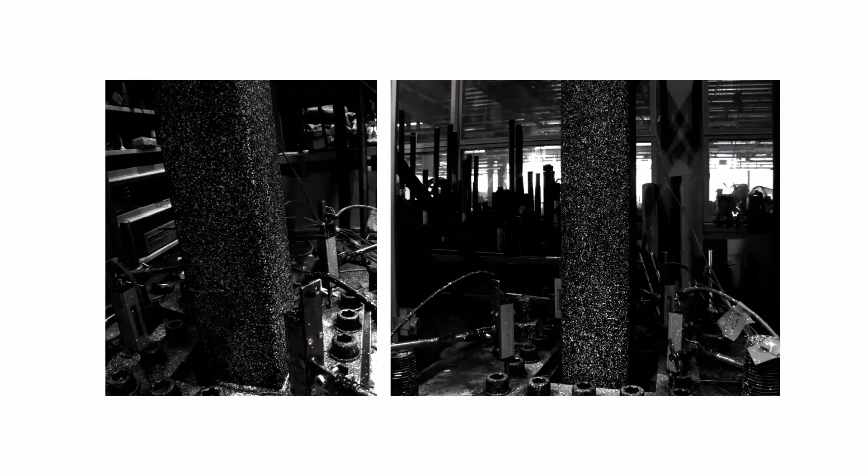Thank you very much, Marco. It's indeed a great pleasure to talk to you today a bit about my PhD research, mainly on the cyclic response of steel tubes infilled with rubberized alkali-activated concrete. So this is really what I'll be presenting to you about today.

We tested some steel tubes under reverse cyclic loading, and we looked at the member response and other key seismic design parameters. But before I talk about this, it's perhaps wise just to let you know how we got to this point, what is alkali-activated concrete and what rubber has to do with it.

You might be aware that concrete is the most consumed material on the planet, second actually after water, and we produce about 30 billion tons of concrete every year. This is a very large number that is sometimes hard to imagine. So just to put it in perspective, at this rate we produce enough concrete to fill the size of Big Ben every 35 seconds.

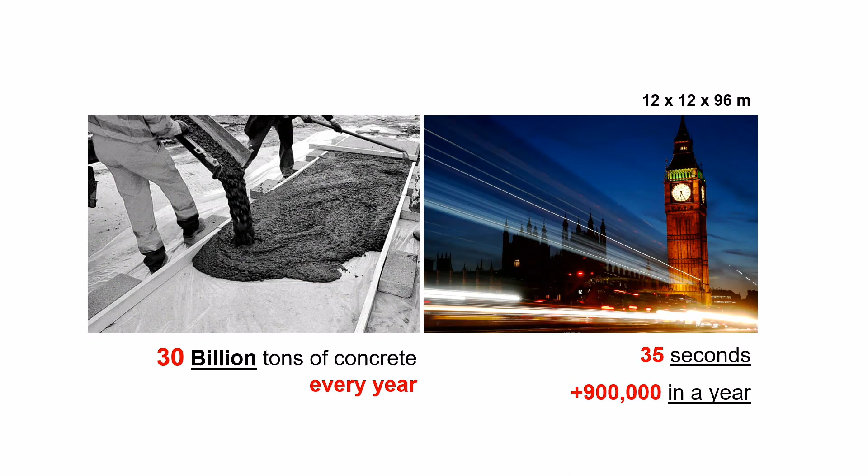In other words, we produce enough concrete to fill the size of over 900,000 Big Bens in a year. That's a problem because cement, one of the main ingredients in concrete, its production is quite highly energy intensive and is responsible for about 8% of global carbon emissions. So if cement was a country, it would be ranked third, just behind China and the US, and way ahead of the UK in terms of carbon emissions.

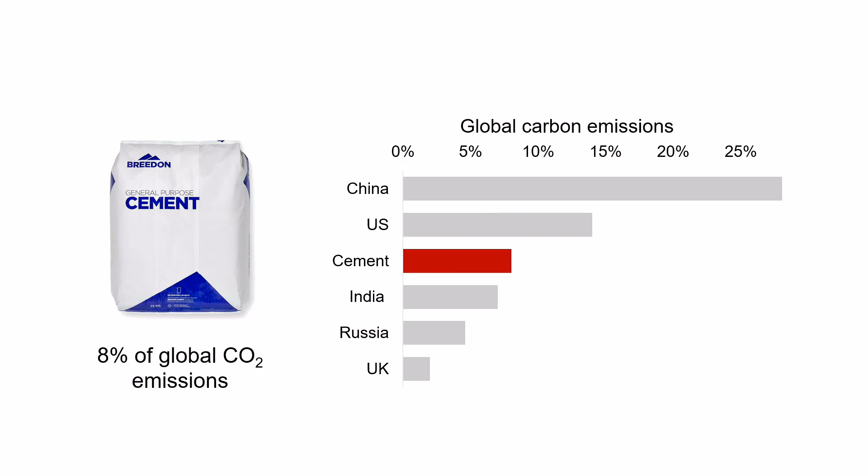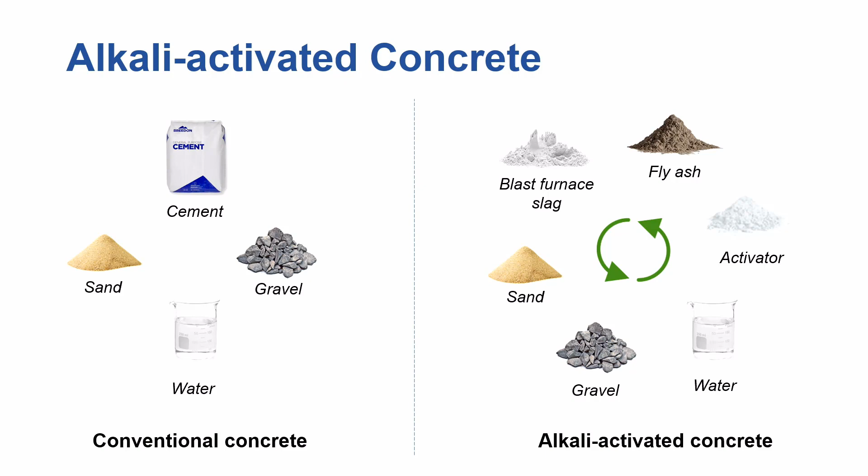So conventional concrete at its most basic level is made up of cement, sand, gravel, and water. And alkali-activated concrete tries to avoid cement completely. It replaces that with industrial waste materials. The most famous among those is blast furnace slag and fly ash, and these are less reactive than cement. So usually a chemical activator is added to the mix just to enhance the reaction of those industrial waste materials. And then you have the sand, the gravel, and the water, just like in normal concrete.

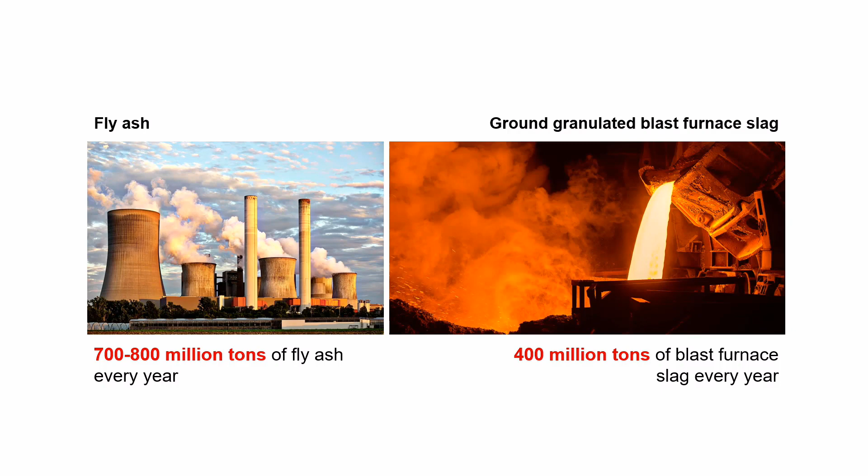And in case you're wondering, fly ash is a byproduct of burning coal in electricity generating power plants, and blast furnace slag is a byproduct of iron manufacturing. Then rubberized concrete is basically replacing a proportion of the natural aggregates, including the sand and gravel, with rubber particles derived from end-of-life tires.

End-of-life tires are notoriously difficult to recycle. Every year, about 1.2 billion tires reach their end of life. A lot of them get discarded in landfills. So the possibility of using them in concrete is indeed promising, but not just from a sustainability point of view.

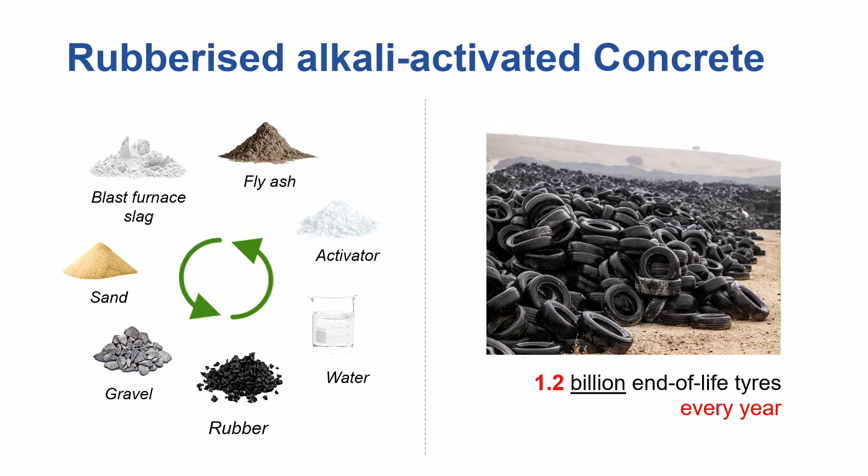Adding rubber into concrete changes its behavior. It makes it more flexible so it can be used in certain seismic applications. It increases the ductility of the concrete.

So these are the constituent materials that I've used in my PhD research. The cement replacements include the fly ash, blast furnace slag, and a chemical activator. In my case, I've used sodium metasilicate anhydrous. And then we added another chemical called borax just to enhance the workability of the mix and increase the setting time for this type of concrete.

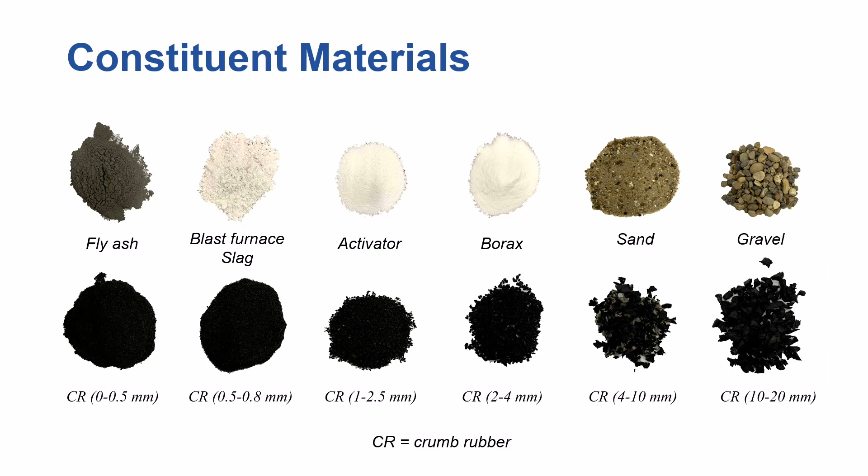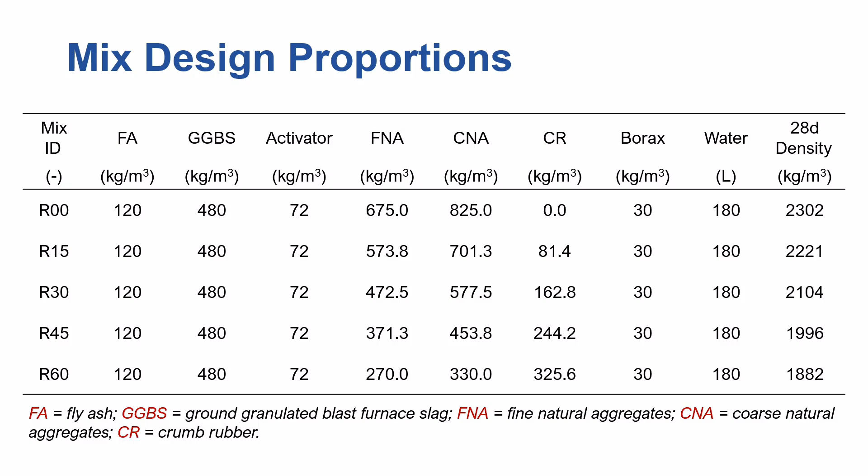Then there was the sand and gravel, and we used 6 different sizes of rubber particles just to ensure an optimum gradation of rubber. And then we initially tested 5 different mixes. We named them R0, R15, R30 up to R60, and this just refers to the rubber replacement ratio. So R0 had no rubber content, and then R15 is we replaced 15% of the natural aggregates with rubber particles, and so on until R60, which had the largest rubber replacement ratio of about 60% of the natural aggregates.

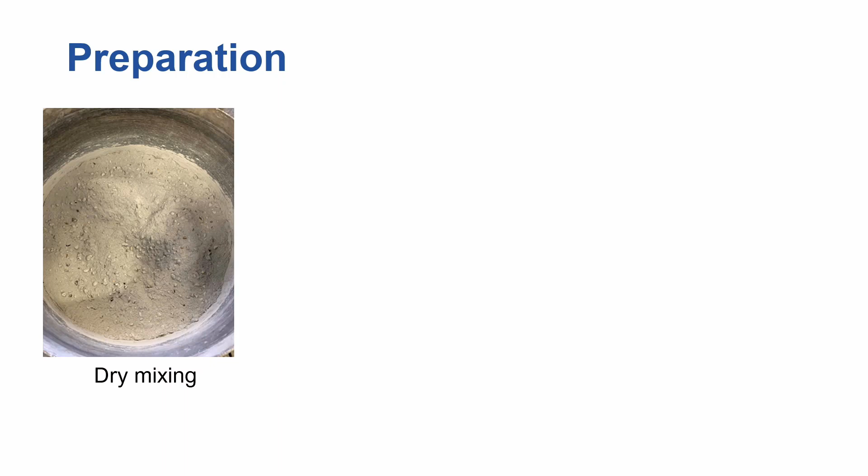So this is the preparation process. Quite similar to normal concrete, mixing the dry ingredients. I did this in the lab for about 5 to 8 minutes, and then adding water and mixing for another 5 to 8 minutes, and then casting and allowing the specimens to cure. We cure them under ambient laboratory conditions.

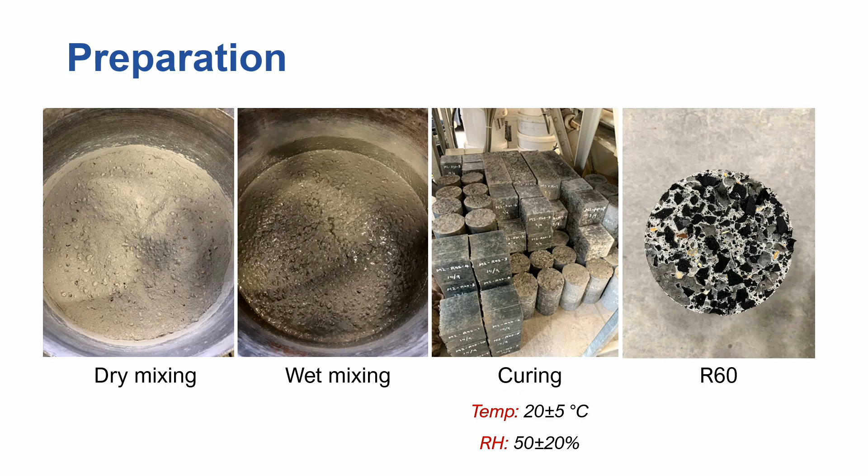This is just a photo, a cross-section of one of the cylinders, the R60, with the R60 concrete having the largest rubber content. Just shows the dispersion of rubber throughout the cross-section. Then we initially tested those for the fundamental mechanical properties, including the compressive strength, the stress-strain response, the splitting tensile strength, and the flexural strength.

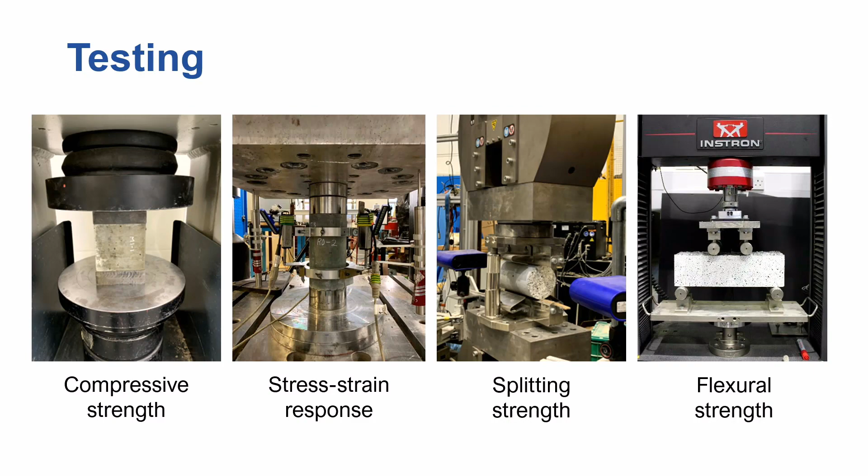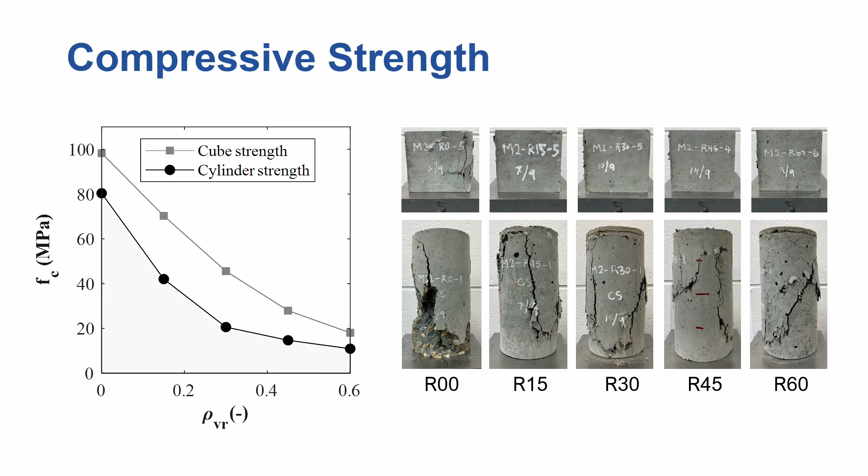But then these are the failure patterns. The non-rubberized one, the R0 specimens, they failed in a very brittle manner, whereas the ones with the rubberized concrete, I'm showing here R30 and R60, they failed in a gradual manner by sliding across a diagonal crack.

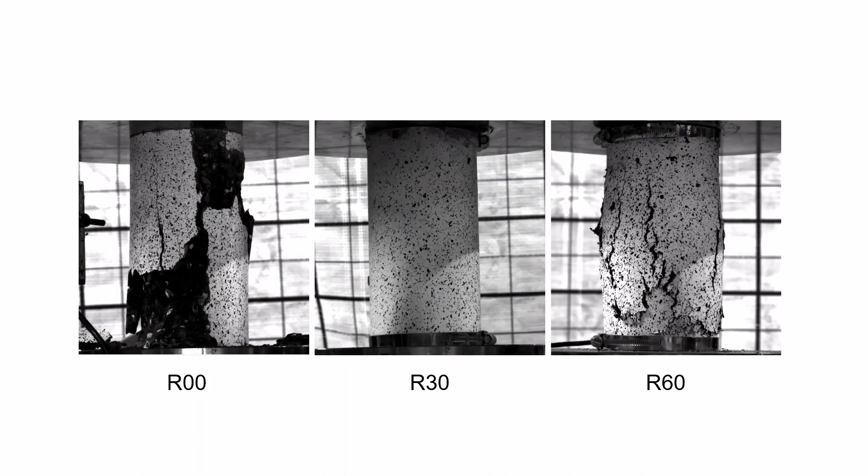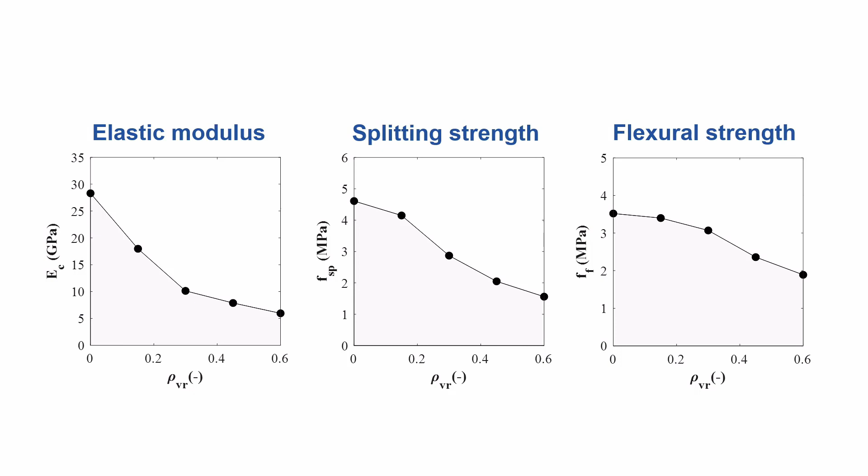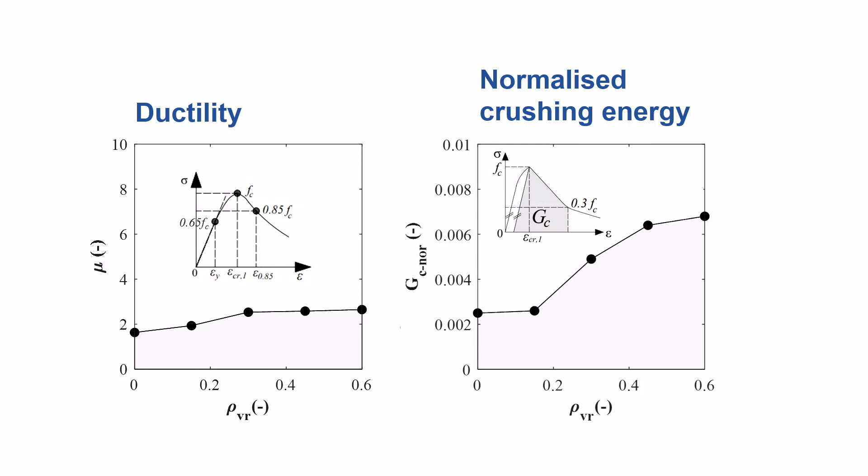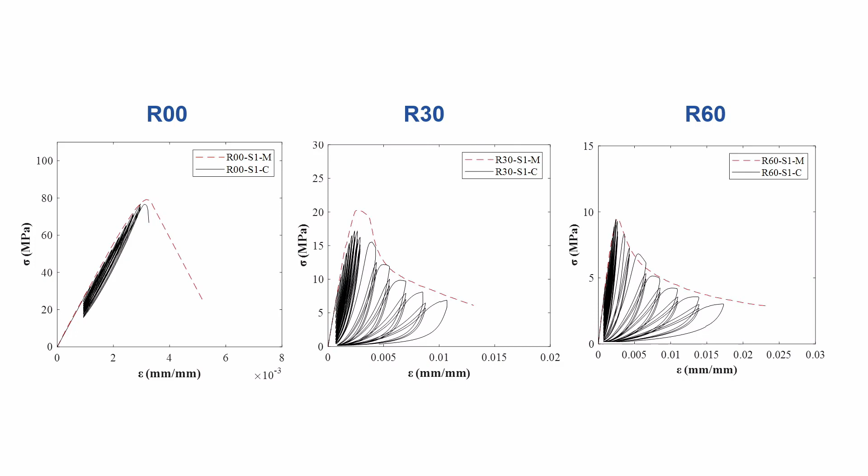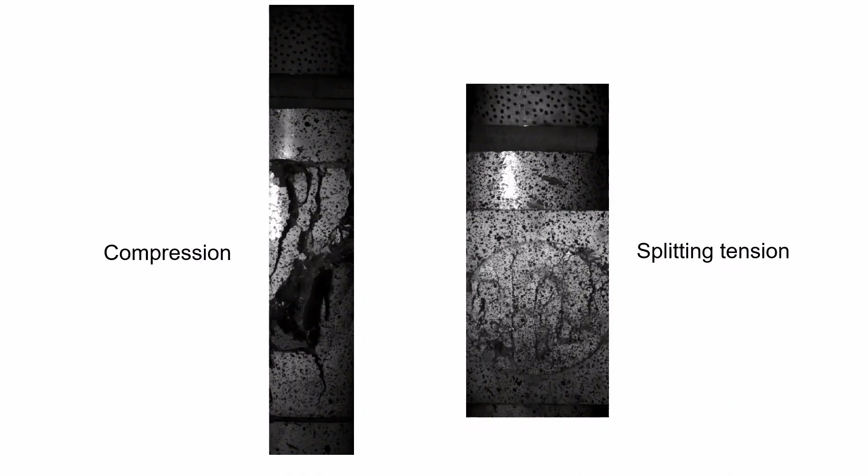And then we studied the impact response of such concrete under compression and splitting tension. And we were mainly interested in the dynamic increase factor. This is simply the ratio of the dynamic strength over the quasi-static strength at a given strain rate. So I'm plotting here the results for R00, R30, and R60.

And the dynamic increase factor tends to increase as the strain rate increases, initially gradually, and then there comes a point where it just shoots up. We call this the critical transition strain rate.

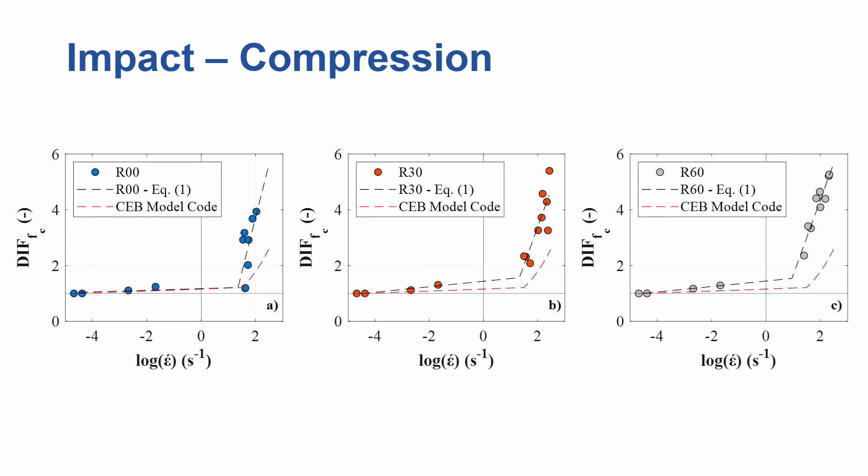What's more interesting is I'm plotting in the red lines the predictions by the CEB Model Code 2010, and as the rubber content in the concrete increases, the expressions become inappropriate for rubberized concrete. We see that under compression, and the same here for splitting tension. And we just see that the rubber really dominates or controls the behavior under impact.

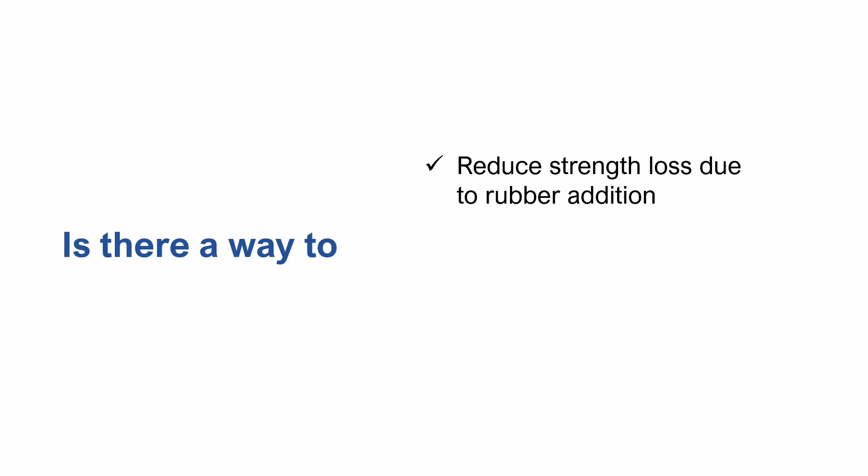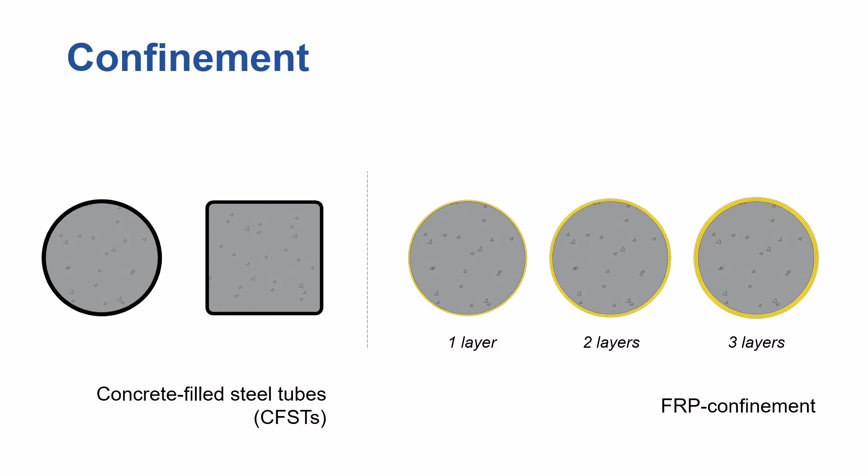So up to this point, we're like, okay, we fairly understand now the mechanical properties of rubberized concrete. Now, is there a way to reduce the strength loss due to rubber addition and maintain the deformation benefits we see from rubberized concrete? And that led us to look at confinement. So we looked at concrete-filled steel tubes, circular sections and square sections, and we looked at another system of confinement by wrapping our specimens with fiber reinforced polymer.

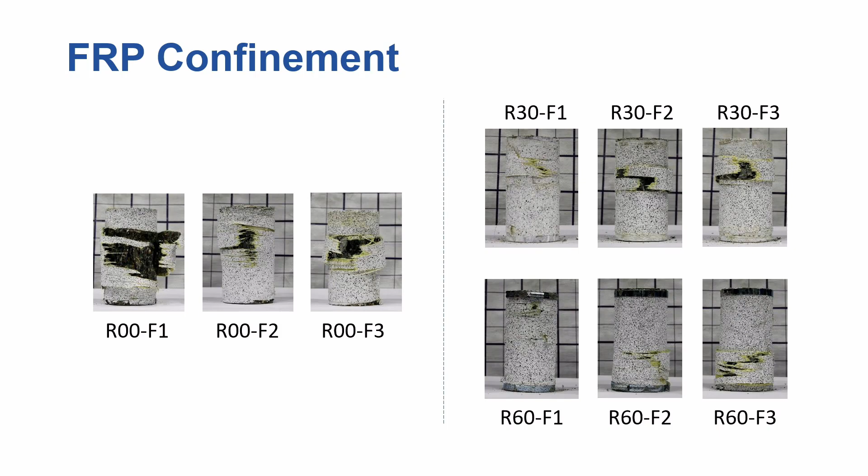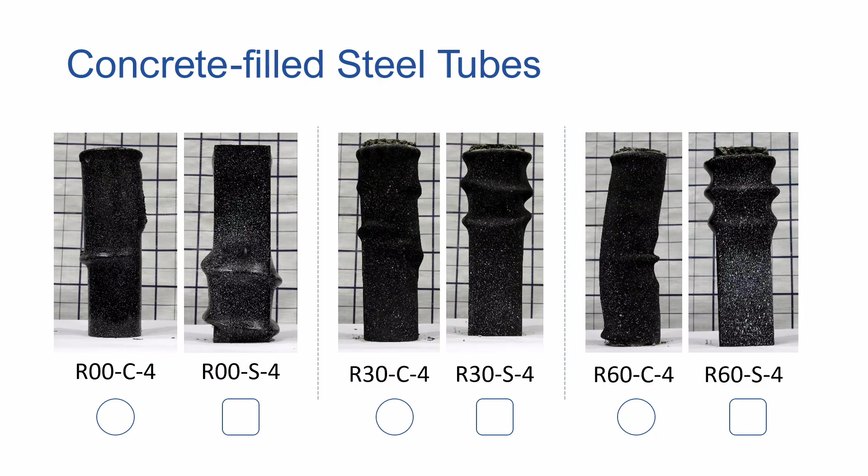So I'm showing here the failure patterns for the FRP confined specimens, that they failed by rupture of the FRP and crushing of the concrete. And these are the failure patterns for the concrete-filled steel tubes. They failed by, as you'd expect, buckling of the steel and crushing of the concrete. So these were tested under axial compression. And this just shows here the comparison of these.

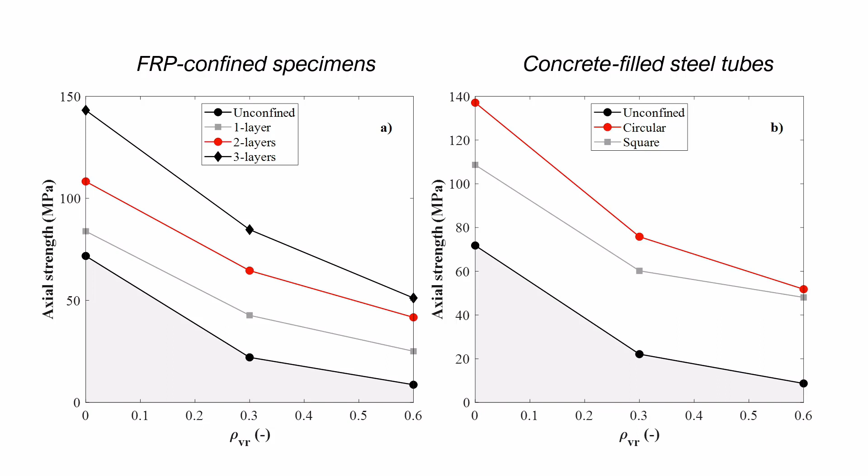And then the plot on the right here shows, for the concrete-filled steel tubes, just the effect of the steel on the strength. So there's the square specimens and also the circular specimens.

We actually went further and did some numerical modeling just to really understand the effect of confinement. Here I'm plotting the confinement effectiveness, which is simply the confined strength over the unconfined compressive strength, against the confinement ratio, which is a function of the FRP material properties. And we see a kind of linear relationship between the two, which is just saying that the more confinement you have, the higher the strength. And this is not affected that much by the type of FRP. We considered glass fiber, aramid, carbon fiber reinforced polymer, and basalt fiber reinforced polymer.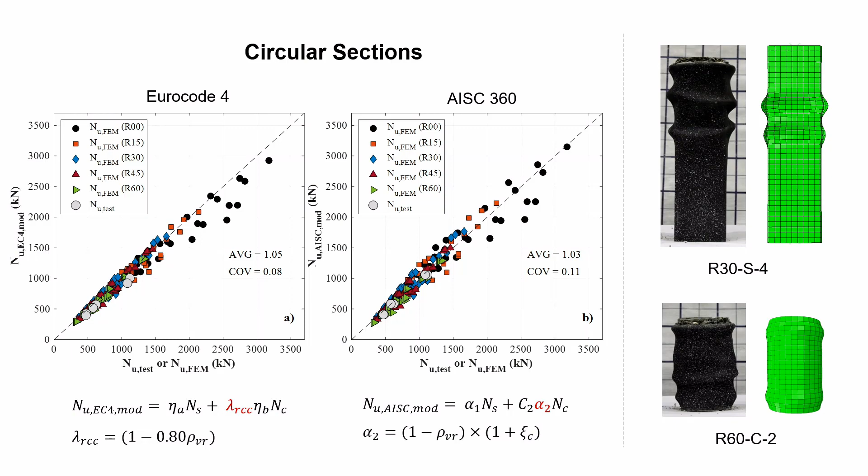So at this point, we were like, okay, we understand very well the axial behavior. What about the member cyclic response? This was around last year, and then the second fund came through, so that encouraged us to really look at the member cyclic response.

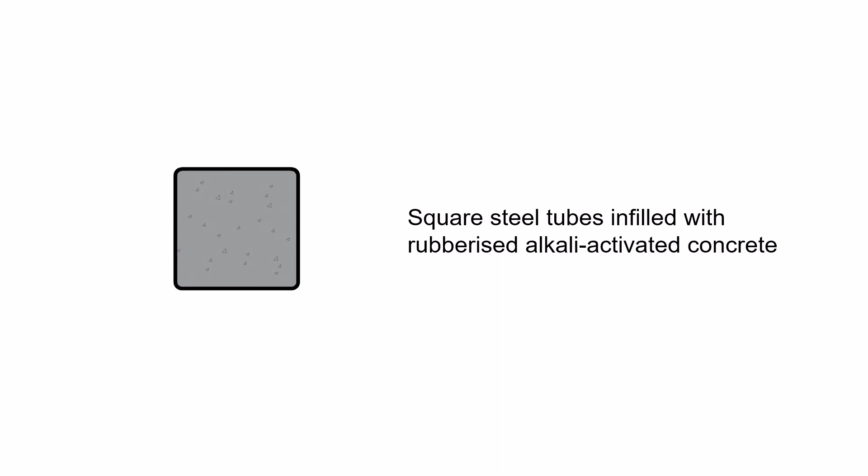We decided to look at square steel tubes infilled with rubberized alkali-activated concrete, mainly because of limitation. We couldn't test circular sections because of time and money. And there are a few studies in the literature that looked at the effect of rubberized concrete on circular sections. These members are widely used in practice, so we figured we might study them and really understand how rubberized concrete affects those square tubes.

So for the specimen details of this particular experimental program, we tested 9 different specimens. We grouped them into 4 groups. The initial 2, the ST there, ST stands for steel tubes. These are just hollow steel specimens for comparison purposes. And then the CF stands for concrete filled, followed by the type of concrete infill. So we considered R0 mixes, R30 and R60.

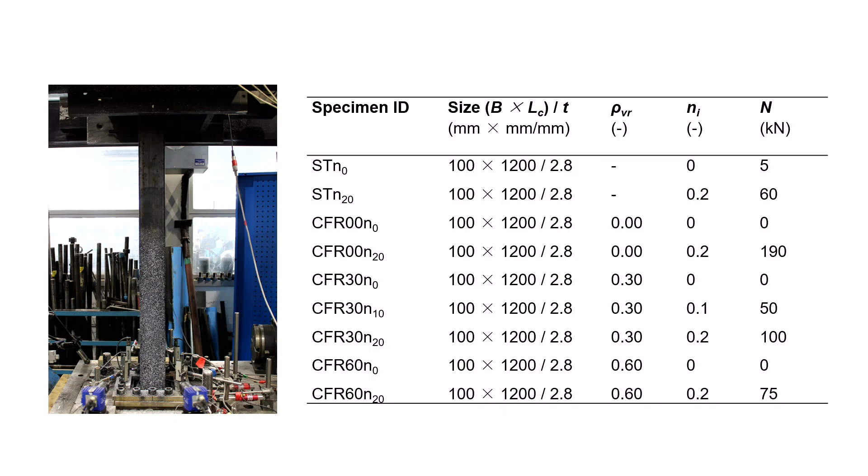All specimens were 100 by 100 millimeter in cross section, and they had a nominal length of about 1,200 millimeters and a steel tube thickness of about 2.8 millimeters. And then we considered 2 axial load levels, about 0, which represents a case under bending, and 20% of the axial cross-sectional capacity. These are referred to as N0 and N20 in the naming format. For the R30 specimens, we had an extra specimen, so we decided to test it under an axial load level of about 10%.

And then for the test setup, we welded steel plates at the top and bottom of the specimen, and then we bolted the bottom plate to a very stiff foundation, so that the specimens were essentially tested as vertical cantilevers. And then we had a vertical actuator that applied the axial load, which was maintained throughout the test, and a lateral actuator that applied the lateral displacements.

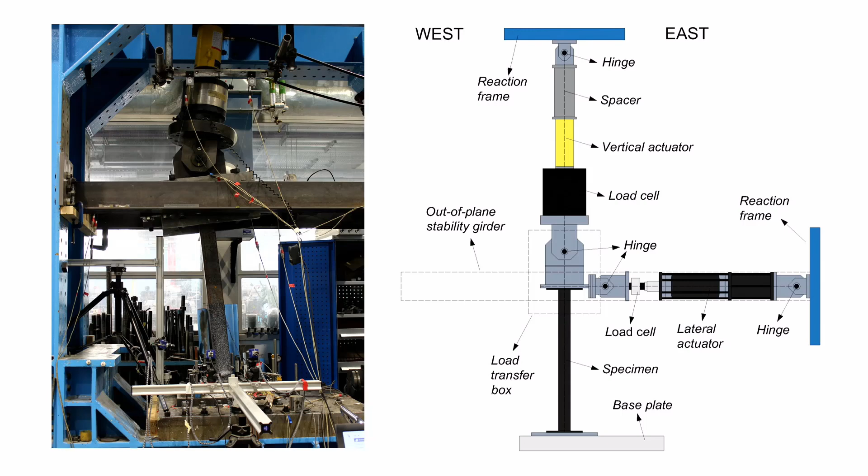And this is the displacement sequence. Initially, before yield, we applied 1 incremental displacement up to about a displacement level of 12 millimeters, and then we applied 3 repetitive displacements that increased up to about a drift ratio of 10%, or 120 millimeter displacement on each side.

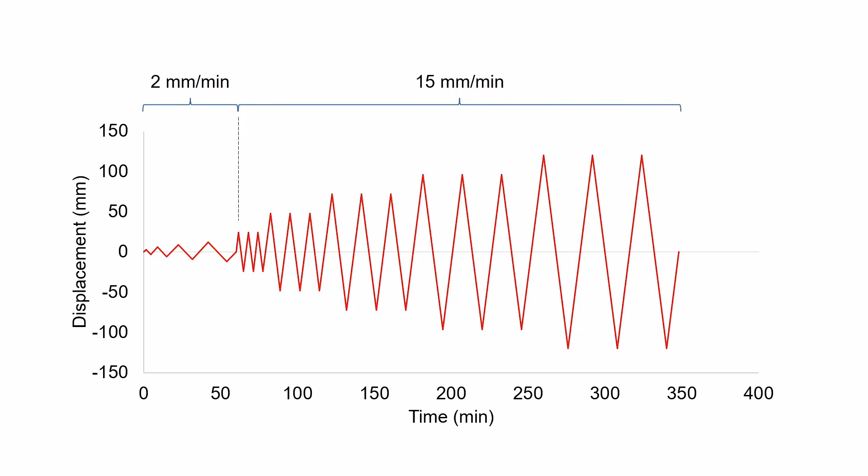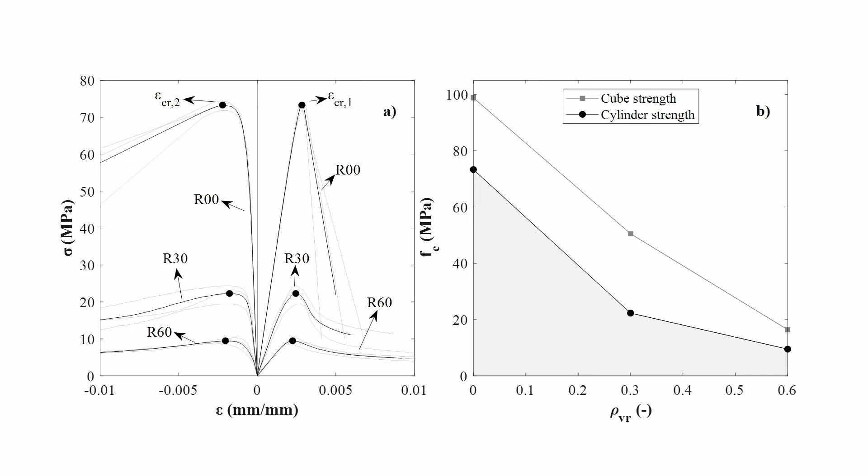And these are just the material properties. So these are the stress-strain curves and strengths for the infill concrete. The R0 specimens had a 28-day strength of about 72 megapascals. The R30 concrete was just over 20 megapascals in strength, and the R60 concrete was about 10 megapascals.

Then these are the properties for the steel tubes. We did coupon tests. Because of the cold working of these square sections, residual stresses tend to develop in the corners, so that increases the yield strength. So we did tensile coupon tests from the flat sides of the tube and from the corner sides, and these are the results. And then we did some squash tests, which give a more representative value of the cross-sectional capacity. And we took the yield strength to be that, which was about 295 megapascals.

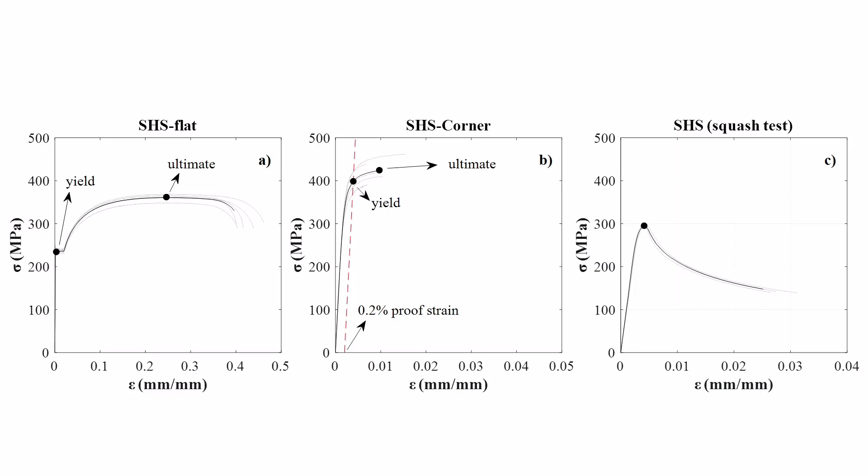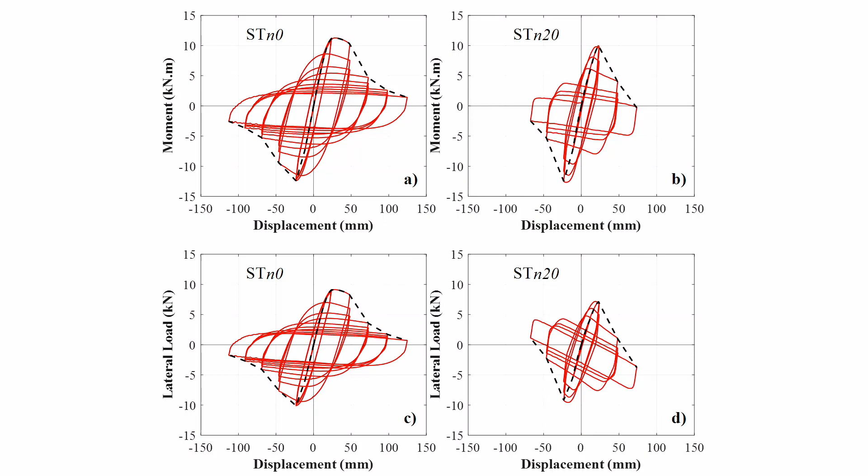And then I'm also plotting at the bottom there the lateral load against the displacement results. And the lateral load was taken as the effective lateral load at the top of the member, plotted against the top displacement. So these are the results for the hollow steel tubes. N0 is the zero axial load level, and N20 is when they had an axial load level about 20% of the cross-section capacity. And then these are the results for the R0 infilled specimens.

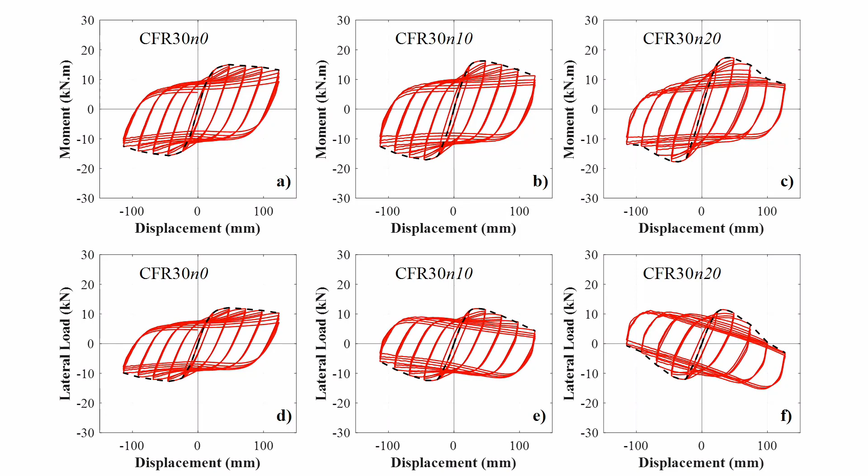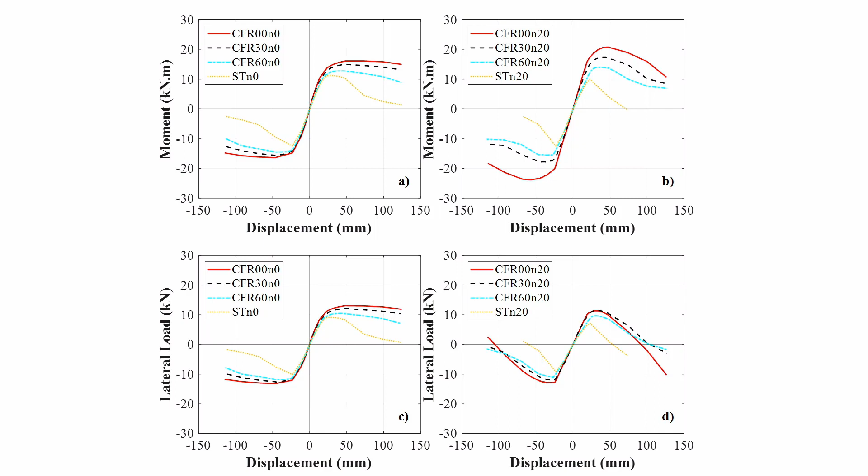And these are for the R30. I'll discuss them more in a bit. And these are the results for the R60 specimens. A good way to compare them is to look at the backbone curves. So these are the results for the backbone curves, including the moments and the lateral loads for a given axial load level. And I'm going to discuss those further, but I'll show you the failure patterns.

So the hollow steel tubes kind of failed by inward and outward buckling, and then they developed fractures at a given displacement rate. Whereas the concrete-filled steel tubes, they all failed by outward buckling and crushing of the concrete. And then at about drift ratios of 10%, they started to develop fractures at the buckling area. So these are the ones for the R30 infilled tubes and R60 infilled tubes.

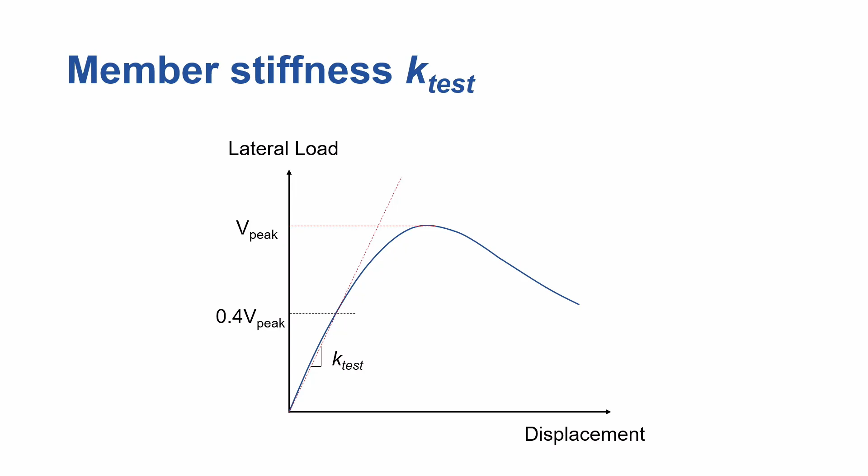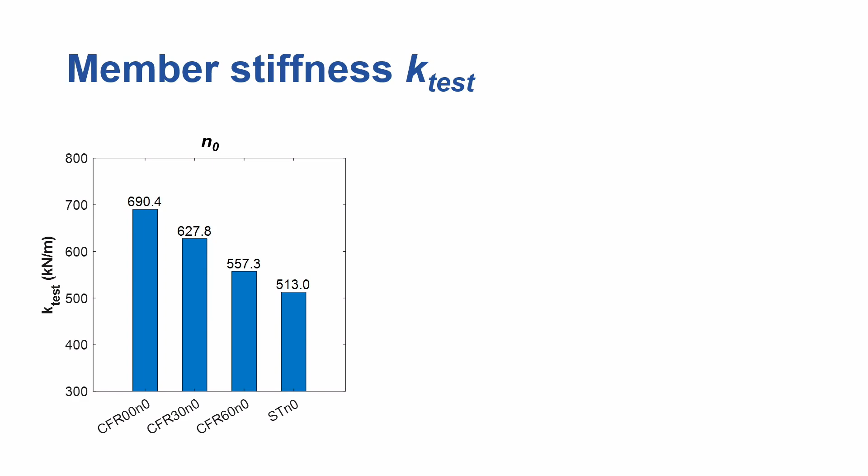Here we looked at the member stiffness. We took this as the secant stiffness, which is basically plotting a straight line from the origin to about 40% of the peak lateral load. So we took those from the lateral load displacement envelope curves. And one thing we noticed, so these are the results for the specimen with zero axial load level. As the rubber content increased, the secant stiffness reduced. And that makes sense because the rubberized concrete has a lower elastic modulus, so you'd expect to see that.

And then for a given member type, we noticed that as the axial load level increased, we saw a reduction in the secant stiffness. That was quite significant in certain members, indicating that the secant stiffness was sensitive to the axial load level.

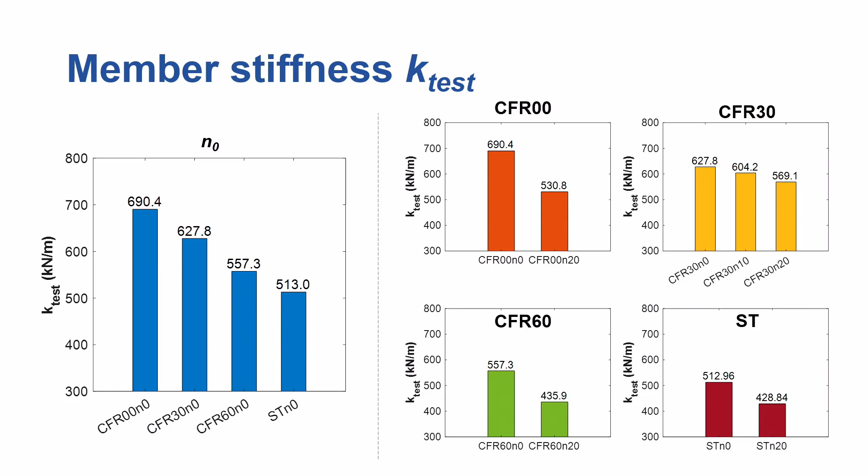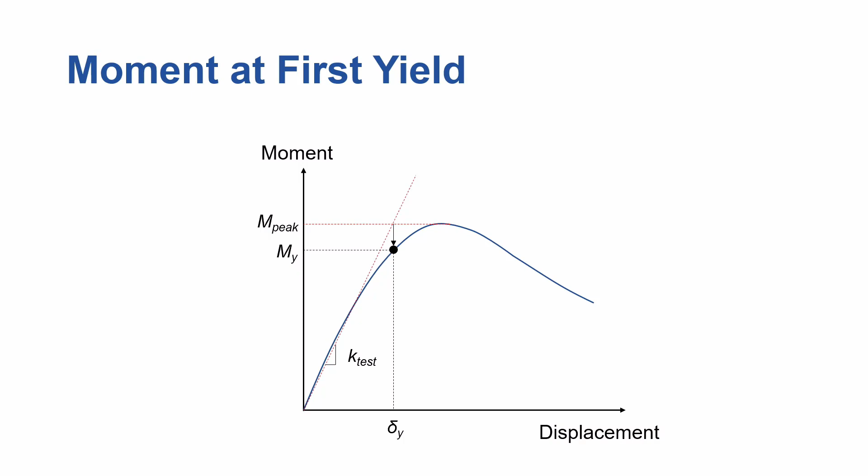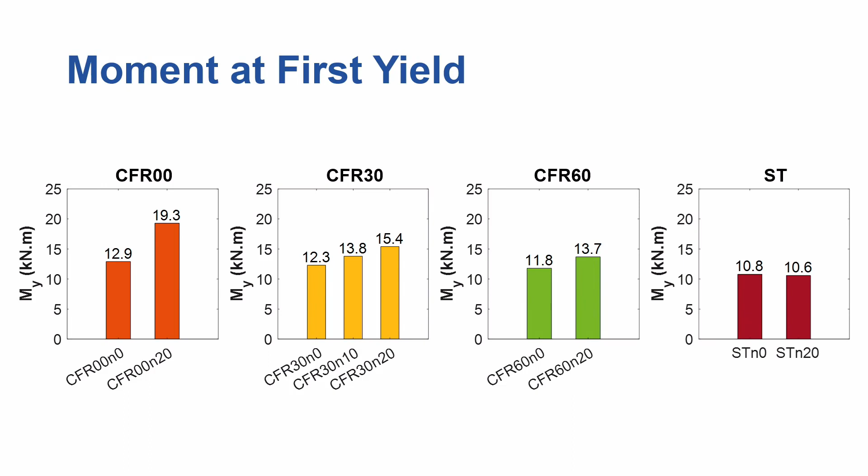Then we looked at the moment at first yield, also from the envelope curves of the moment displacement curves. And this was estimated as the straight line from the secant stiffness coinciding with the horizontal line at the peak moment, and just plotting an arrow down to get the estimated moment at first yield. And then these are the results for different specimens. One thing we noticed for the concrete filled specimens is that as the axial load level increased, the moment at first yield increased across all concrete filled specimens, but as the rubber content in the concrete infill increased, the moment at first yield reduced slightly.

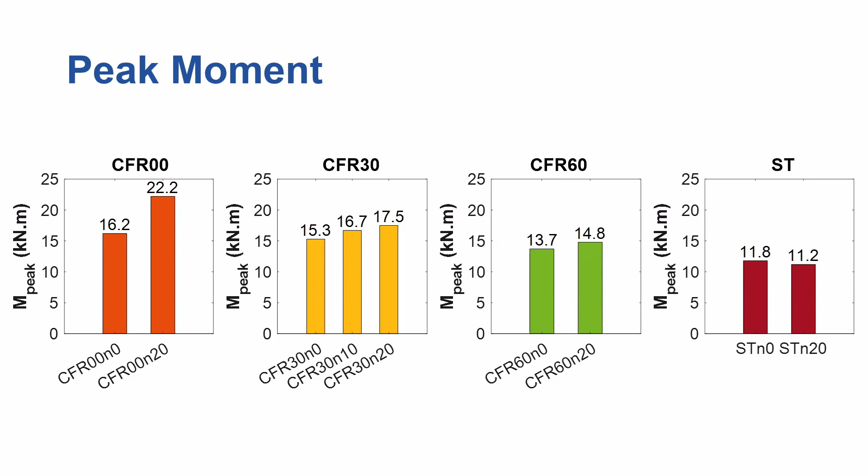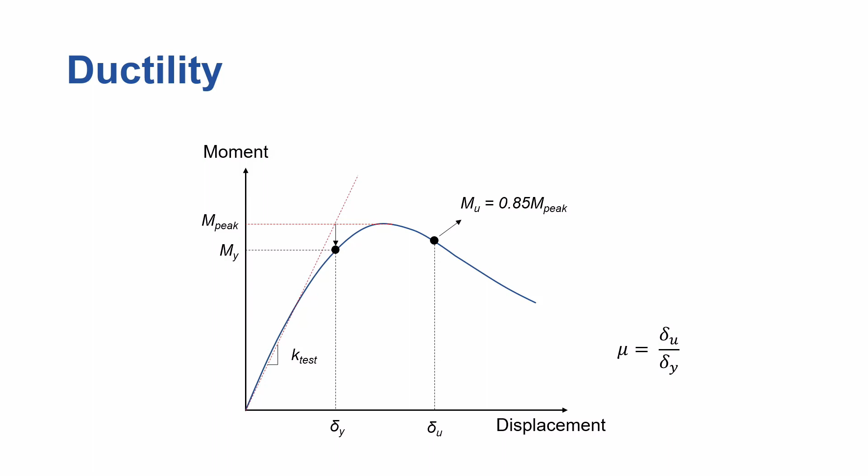And then we looked at the ductility. So this was taken as the ratio of the ultimate displacement to the yield displacement. And the ultimate case here was taken as a drop in moment of about 15% from the peak moment. And then we noticed that as the axial load level increased, the ductility in the members reduced, which makes sense. But then we noticed that as the rubber content in the concrete increased, the ductility still reduced, indicating that those square tubes didn't really benefit that much from the rubberized concrete infill, unlike what is commonly reported for circular sections infilled with rubberized concrete. And we do think that this is mainly because of the lower confinement that the square tube section imparts on the infill concrete.

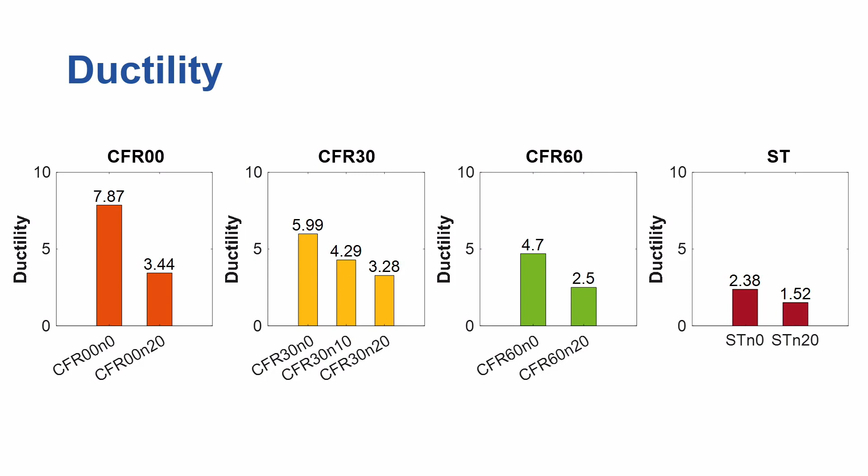Then we looked at the strength interaction. So we looked at Eurocode 4 provisions for a member subjected to uniaxial bending with a coexistent axial load. And we noticed that the test results here fall outside the Eurocode 4 axial load moment interaction curves, indicating that the code is quite safe for such members, in fact, a bit conservative.

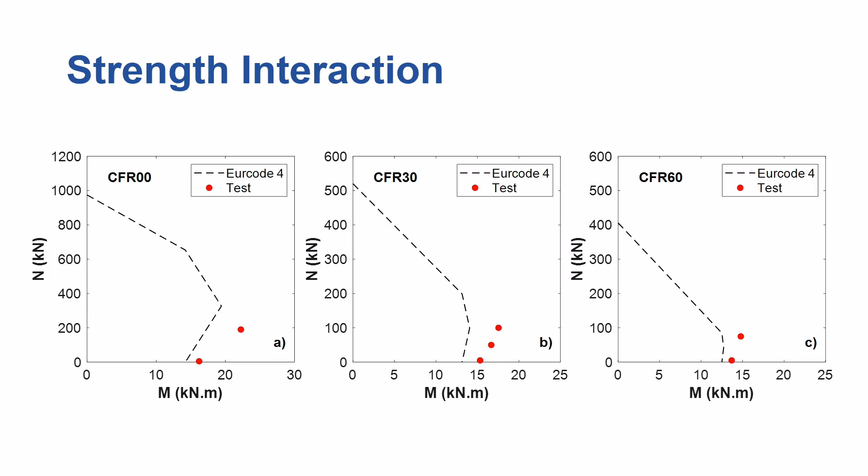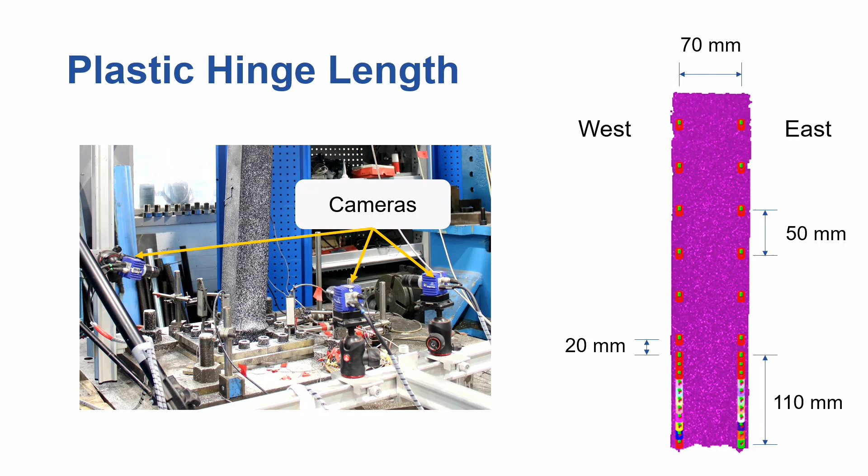And then we looked at the plastic hinge length as well. While testing, we had cameras that monitored the displacements near the fixed end of the column. Then I post-processed the results and placed virtual strain gauges on the area of interest, about 35 virtual strain gauges, and looked at the axial strains at a given displacement level.

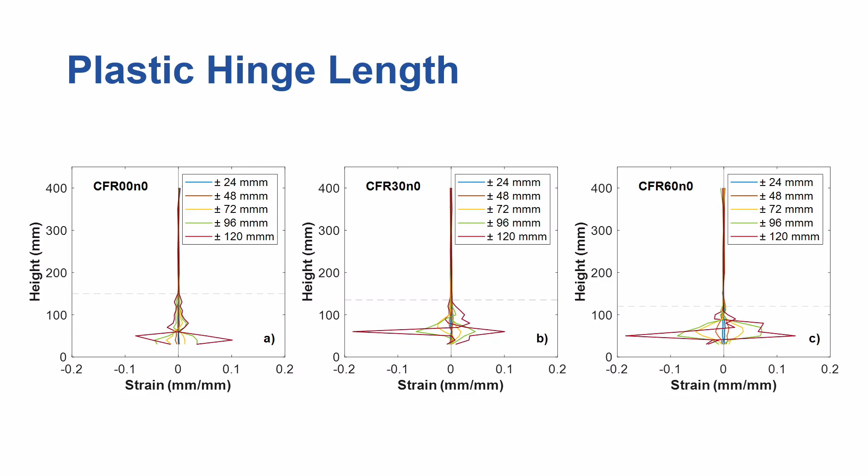So here I'm plotting some of the results for the concrete filled specimens at 0% axial load. I'm plotting this across the height, with the strains at a given displacement level, and it clearly shows where the inelastic strains develop in the member, and that's basically the plastic hinge length. So this is a summary of the results.

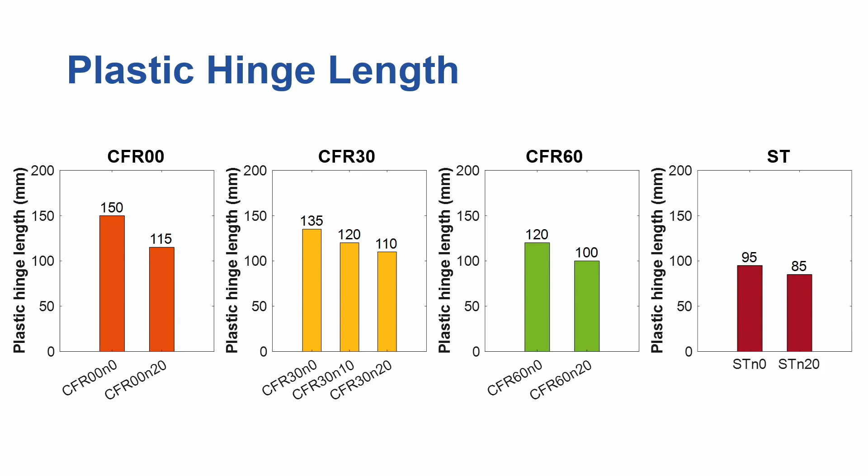So we notice a similar trend: as the axial load level on the specimens increases, the plastic hinge length reduces. Another thing is, as the rubber content in the concrete infill increases, the plastic hinge length reduces slightly. Then last but not least, we looked at the energy dissipation.

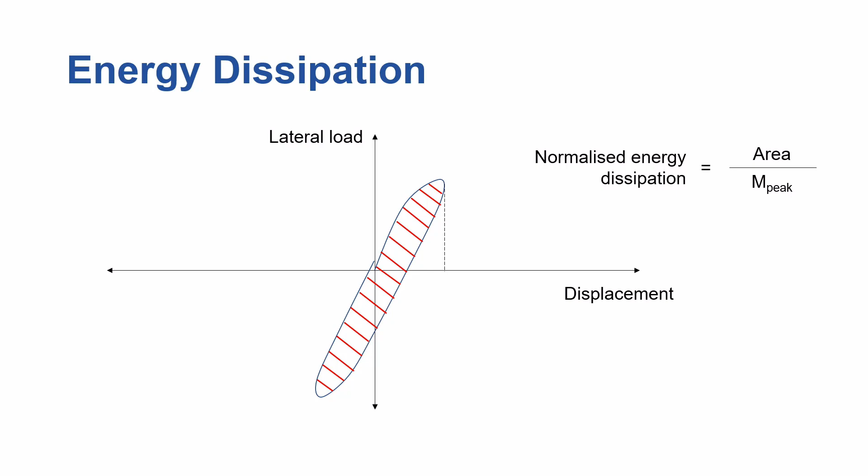So this was taken by the area under a full cycle. And just to make non-dimensional comparisons, we divided that by the peak moment, and then we plotted the results against the displacement level of that cycle. So these are the results for the R0 specimens.

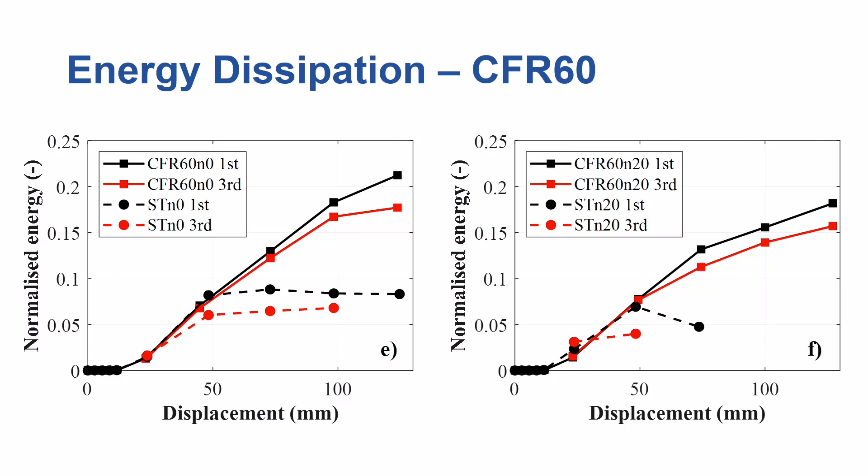So to finish this off, as the rubber content in the concrete infill increases, at least for the case of the square steel tubes, we do see a reduction in stiffness and peak moment, which was expected from the beginning. But the other thing we did not expect is a reduction in ductility and plastic hinge length, indicating that the rubberized concrete didn't help that much for the case of the concrete filled specimens.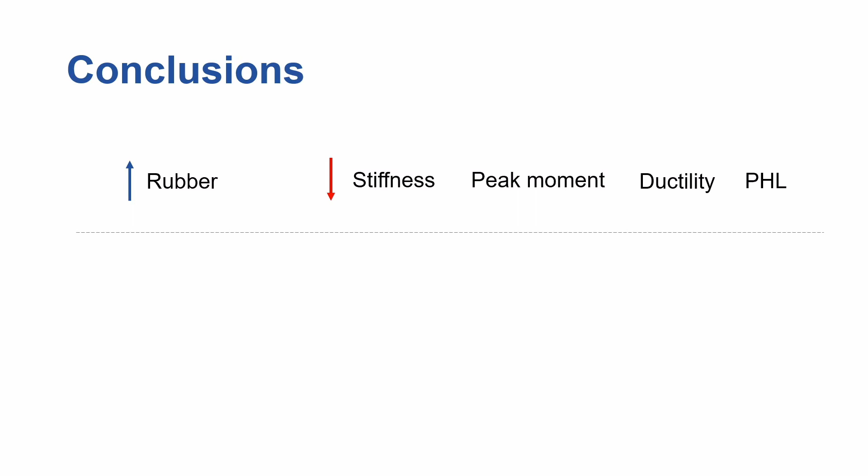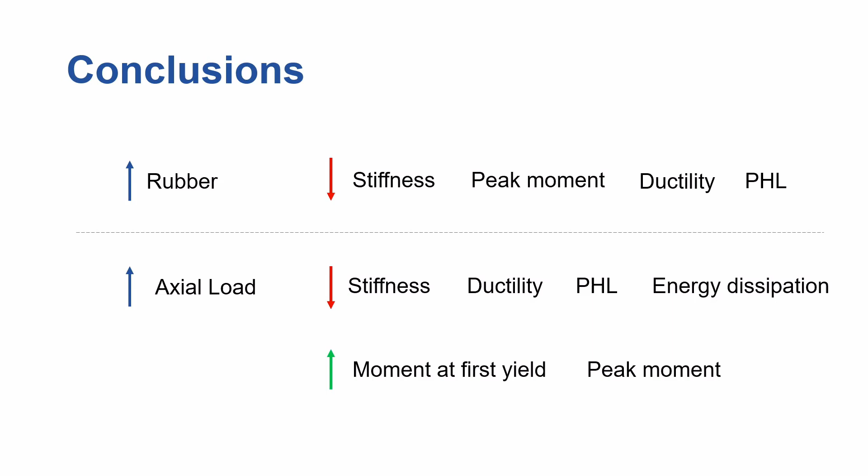And then for the axial load levels considered in this study, there is a reduction in stiffness, ductility, plastic hinge length, and energy dissipation, and an increase in moment at first yield and peak moment. Perhaps on a positive note, just comparing the results of the R60 infill specimens with the hollow steel tubes: although the rubberized concrete didn't really help that much, when you compare it to the hollow steel tubes, you see an increase in almost all parameters, more significantly the ductility.

Particularly Trevor, who would sometimes stay with me a bit late until 6-7 p.m. to finish the test of the members. I have a photo of Trevor here looking at the specimens, just seeing if a fracture has developed so that we could stop the test and go back.

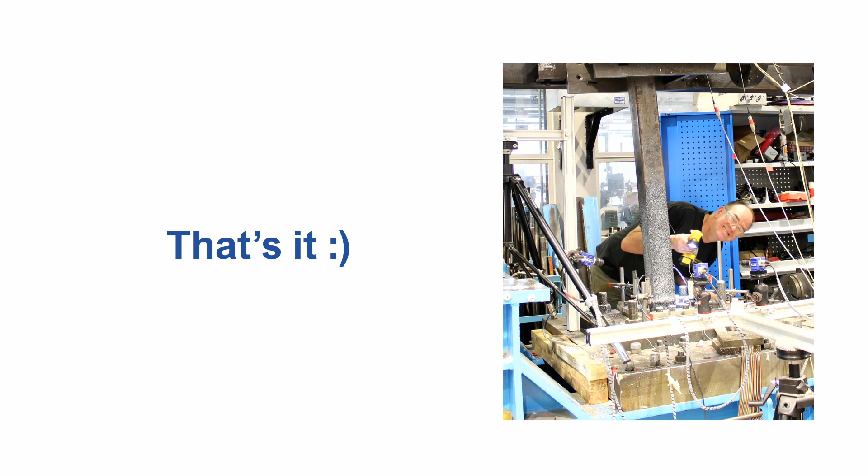I have just a few curiosities about this very comprehensive experimental campaign, and also a question about usability in a very specific situation. First of all, I was curious about the kind of damage observed at the base - if that local buckling is always the same typology, or if there are different typologies, or different kinds of failures. Second is mostly a curiosity - what do you do with the base plate? Do you just throw it away or reuse it when you do your experiment? Just thinking about money. And the third thing is, have you thought about the fire resistance of this material? Because obviously having rubber, you may have some implications, right?

Okay, so I'll start backwards because that's how I remember them. For the fire properties, we wanted to do some fire tests - we wanted to put rubberized specimens in the oven and then see the residual compressive strength and all of that. But then we needed to go through a lot of safety procedures that we eventually decided not to pursue, because you get fumes that come out of the rubber. So we decided not to do it.

But then there are a few studies in the literature that say, because when you add rubber, the concrete becomes more porous, so it has a higher residual compressive strength than the non-rubberized concrete. But then again, the fumes and all of that is an issue, and that's why having concrete-filled steel tubes is actually quite useful in terms of fire resistance with such materials and so on.

Your second question was the plates. Yeah. So the plates we used on this one were recycled. And I think hopefully the specimens are still in the lab. We plan to open them up and look at the crushed concrete, and hopefully we'll recycle them for a next experiment. And I really forgot your first question.